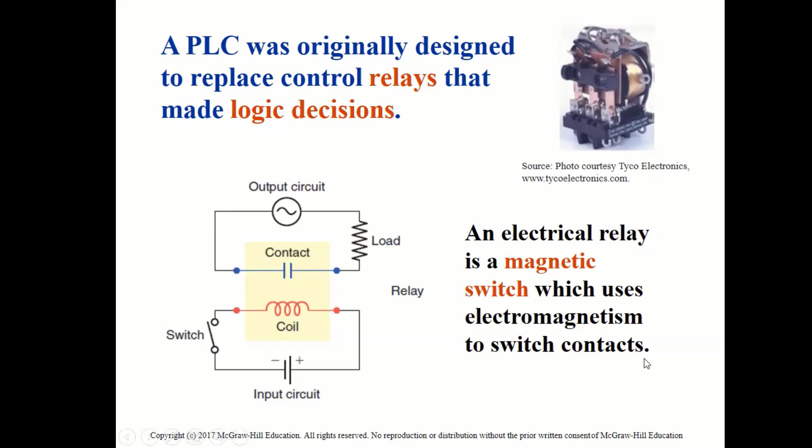Relays, you more or less have an idea of how they work, right? So far, you've seen it. You know what's inside. So I'm not gonna waste your time a lot there, but just know that those electromechanical relays usually come with either a name or some sort of information that you can actually go and look for the variations that you might have.

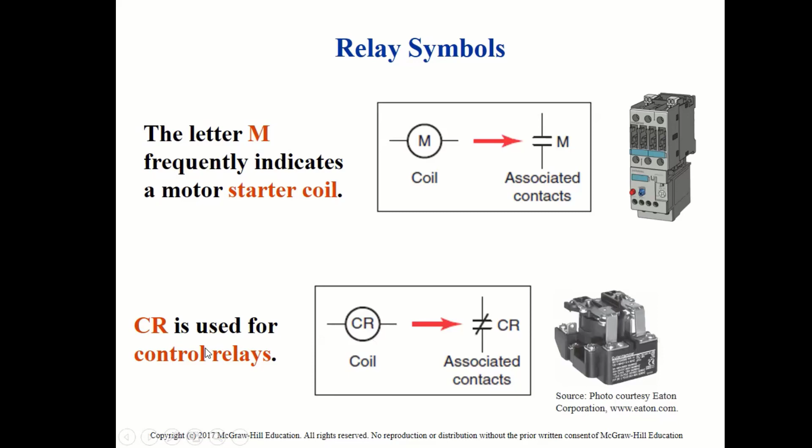And so you energize, de-energize. You've been doing that already. And the contacts, how they work, normally closed, normally open, all that good stuff, you've done it. So we're going to go rather quick. There is usually a difference here between a motor contactor and a control relay. So usually labels like that are going to be on the schematic. M for motor, CR for control relays, which is the one you've been using.

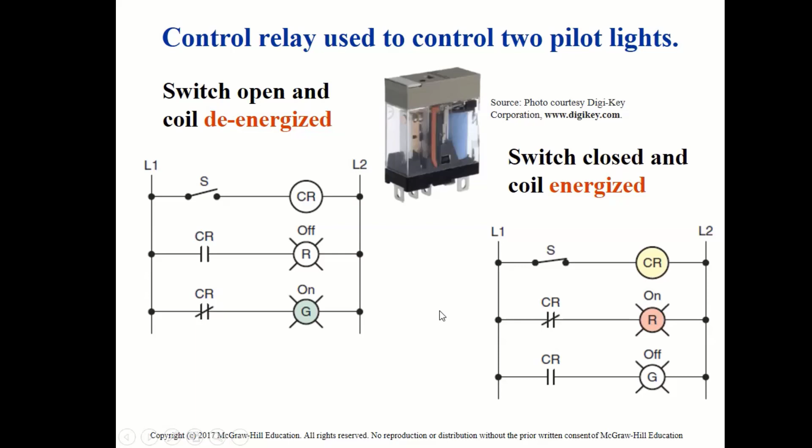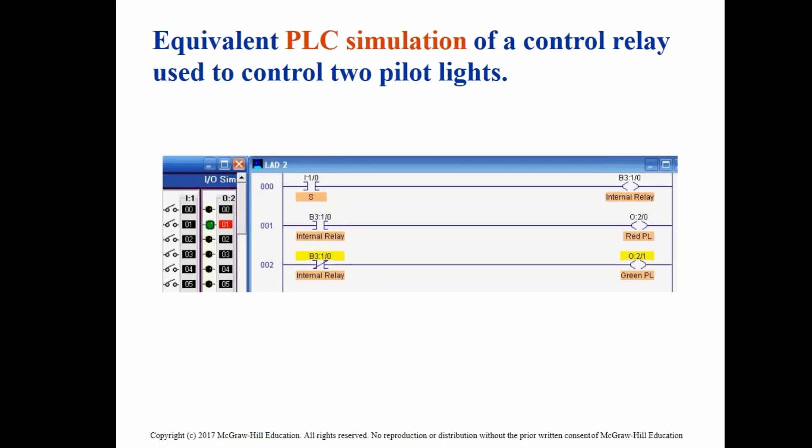All right, there's the relays again. And you guys did some of this already, which is, how do you use the contacts so that you can indicate whether the system is on or off. There's a little demo on that. And you've done not the programming aspect, but the hardware aspect of it. And so that's the next part.

And then I think I briefly mentioned contactors. This is the heavy power loads, things that are used for moving large loads. I'm going to give you a brief demo. At some point today, I got my station kind of working back, and I have one of these large power loads, heavy duty contactors. Remember that I told you that once upon a time when I was learning about PLCs, I connected a load and I burned the PLC.

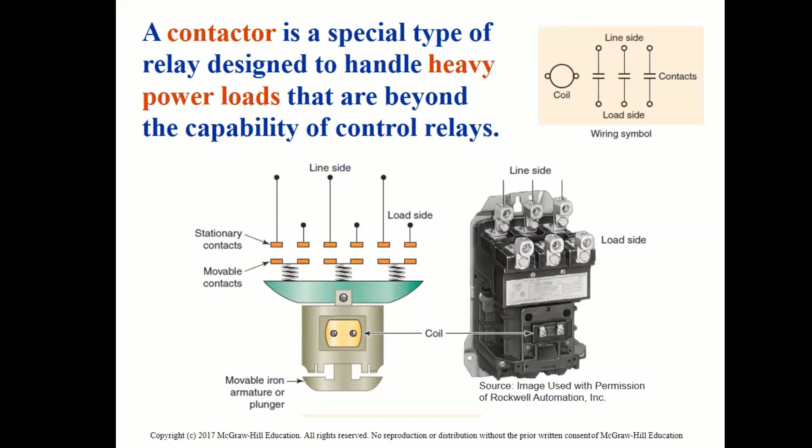And you don't want to do that because PLCs are, again, control devices. They are good to control small loads that at the same time move big loads. So never ever do you want to connect a motor. Well, you can connect a DC motor like the ones we've been using, right? But not a large AC induction motor directly to the PLC contacts because it'll be a little bit too much.

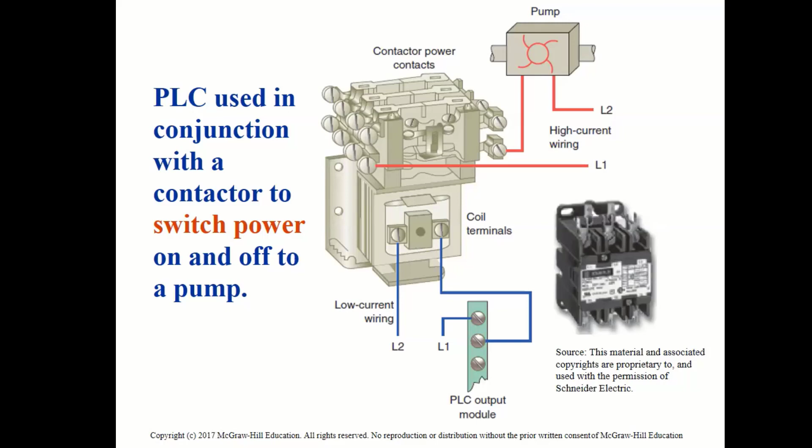So here it is, the contactor. Essentially what the PLC does is just like energizing that coil on that electromechanical relay, the PLC signal will energize the coil terminals, which at the same time make this giant contactor actuate. So you control the coil on that large contactor that controls the load, right? And so that's how we actually take advantage of the automation part of controls.

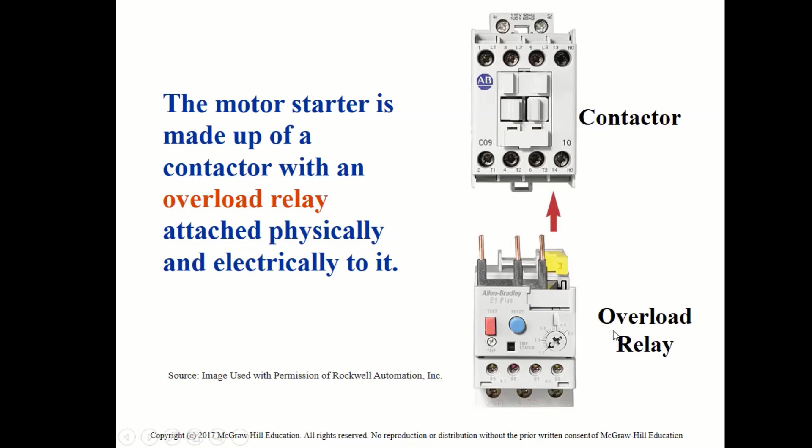All right, motor starters. It's another kind of method that you actually have. So in this case, we have a contactor. It's actually an Allen Bradley brand. And we have an overload relay, which serves as a safety device on the motors. So that if there's an overload, say you have a 5 HP motor, and eventually the load exceeds that amount, this overload relay is going to sense that load. It's going to open up the circuit and hopefully protect everything.

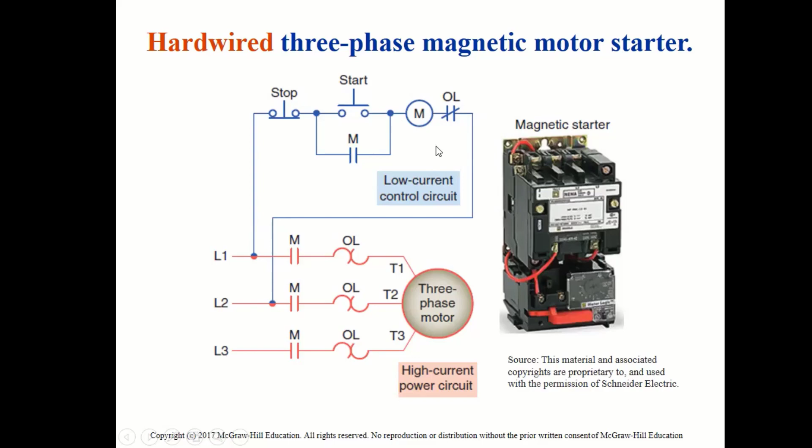But what is really making this happen is your low level voltage control, right? Until you energize the coil of that electromagnetic contactor, nothing is going to happen. So again, the PLC is not controlling the load; it will be controlling your electromagnetic contactor.

So here is a program, and what's involved in a ladder logic program. You're going to have start, stop, the motor auxiliary contact, and then the overload part, right? You want that overload to open up the ladder program if anything happens, right? If any high load beyond the load of the motor is sensed, then you want that to be open. So that's that. Again, same idea here. This is just a simulation of the process.

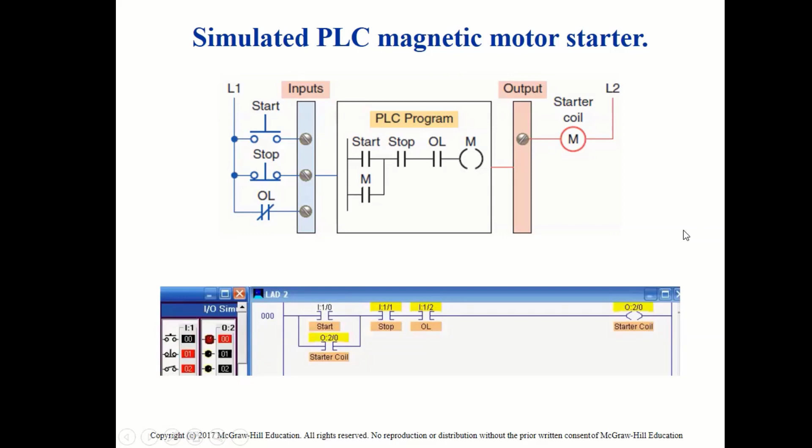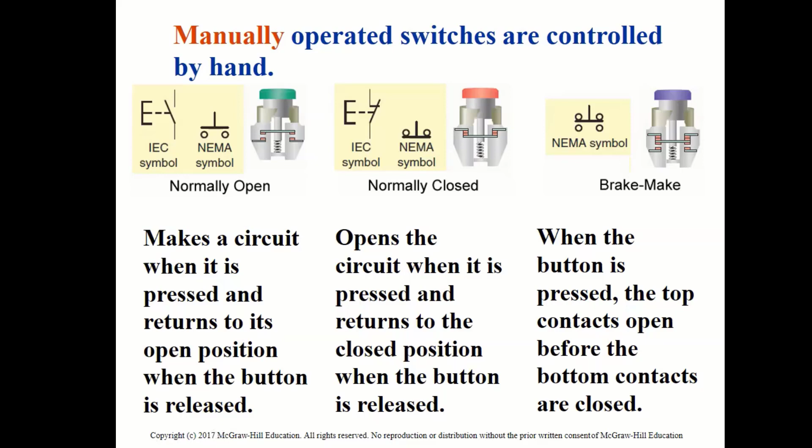Okay. Manually operated switches, there's a lot of those. We talk about them a little bit early on. Normally open is usually for start, normally closed is usually for emergency. And then you have some NEMA type, which are of the type break-make, right? So you have to press to activate them. You press to open, you press to close. And so those are some of the types that you can have.

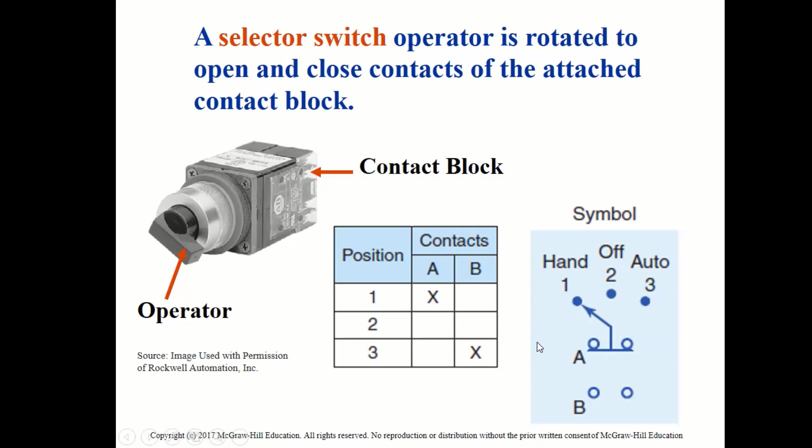You also can have a selector switch that will be used for multiple positions. An example of that is when you want to put your system in auto mode, you want to put the system in off mode, and then in manual mode or hand mode, as is said. So multi-selector switch. You also have DIP switches, which are used when you have various kinds of loads or inputs that you want to put into the system, right?

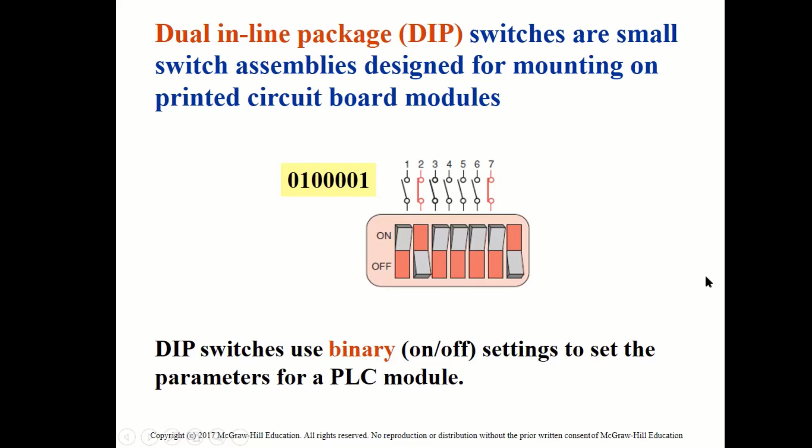All right, mechanically operated switches. Again, there's a lot of electromechanical switches, including limit switches, and run switches is another word that is used.

Hi, Constantine, how you doing? Good, how are you? Welcome. I miss you.

And so these are different kinds of limit switches. And again, the concept of normally closed, normally open, it's on all electromechanical control blades, right? Just be mindful that a normally open contact means that it needs to be energized to be closed. A normally closed contact means that when energized, it opens, right? So that's a concept we've been talking about.

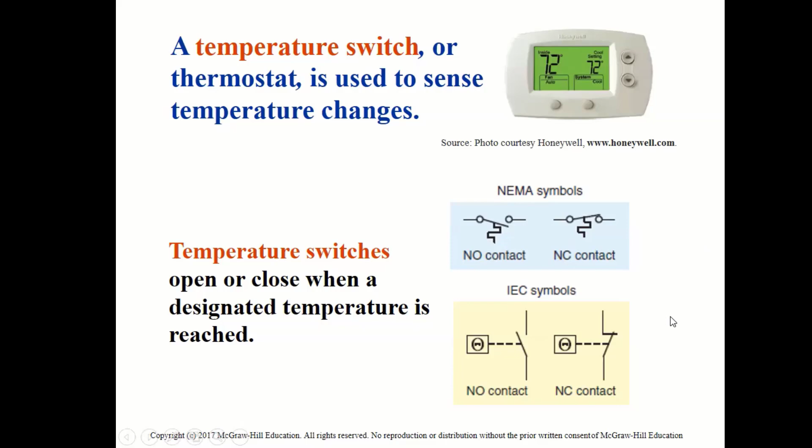Temperature switches, those are switches that will activate or actuate based on sensing temperature, and they will open or close depending upon what their normal default status is, but they will actuate with temperature, right? And the thermostat is always an example that is brought up for that.

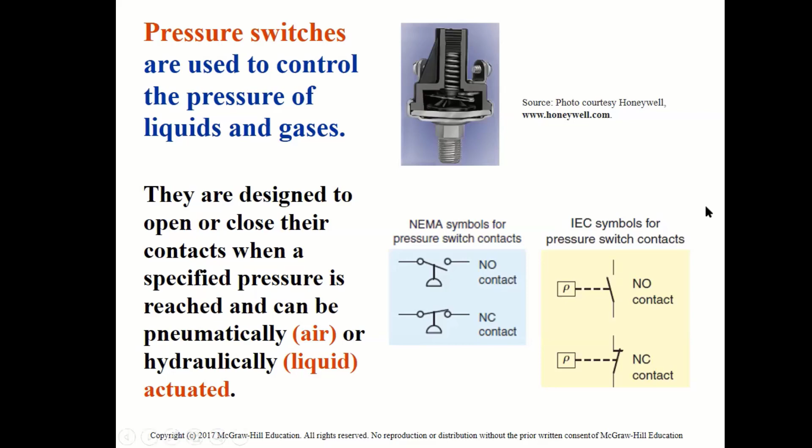You also have pressure switches of different kinds, and they actually can control air or liquids, and they can also be either normally closed or normally open. Compressors, chambers, boilers, and things like that use this type of switches, pressure switches. You also have level switches that you can use to sense liquid levels. And again, the idea of normally open, normally closed is going to be there.

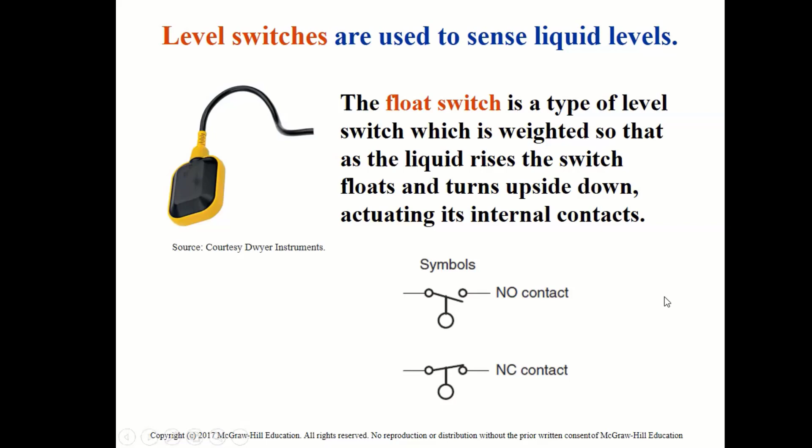All right. You also have sensors, which, generally speaking, we're still talking about discrete components, right? And it is everything that sends a signal to open or close a circuit, or a signal to say, yes, I'm turned on or I'm turned off, right? And so proximity switches can be categorized in a separate group. And the reason being, there's usually solid state electronics involved in those sensors. All right.

Depending on what is being detected, you can have various kinds of sensors. One of them being an inductive sensor. That's proximity sensors that are used to detect both ferrous metals and non-ferrous metals, right? So that will be an inductive type. And there is a little bit of the principle of electromagnetic field inside, which is at work.

Okay, I want to move this a little bit out of your way. All right, so those are inductive sensors.

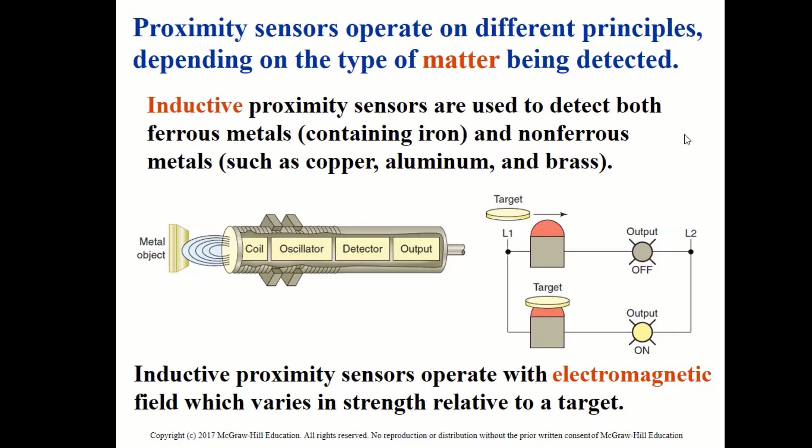You also have proximity sensors that will sense a range of distance. They usually are equipped with an LED status indicator to show you when the sensor is on or off, energized, de-energized. This idea of leakage current is something to keep an eye on, and there's usually a way to fix that, and that's what they call using a bleeder resistor, right?

So that bleeder resistor takes care of that leakage current, and the leakage current could be a problem because it's almost like you're trying to send a liquid or a gas to another place, but at the same time you have a leak somewhere in the pipelines. You don't want that. So in the case of electrons and protons, we actually use a bleeder resistor for that.

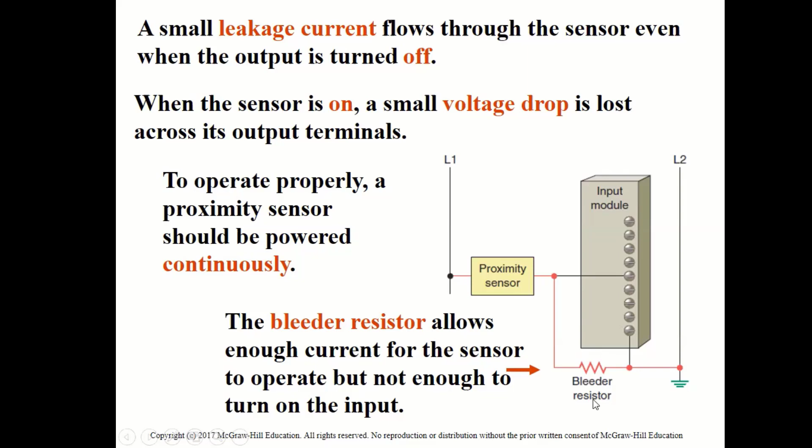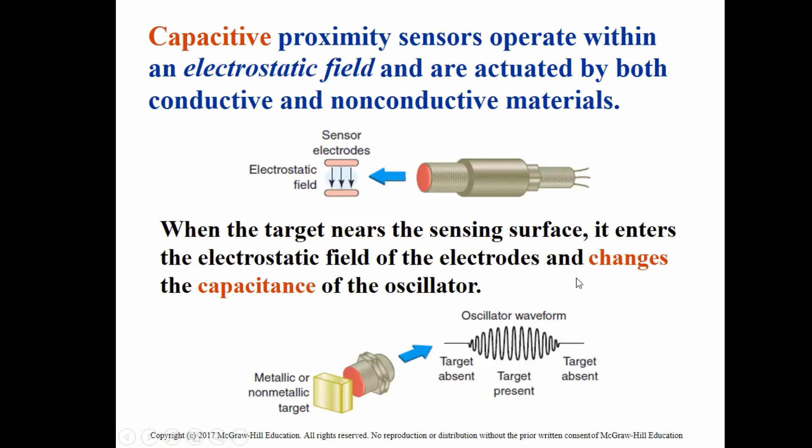You also can have capacitive proximity sensors, which operate on an electrostatic field, and they can be actuated by both conductive and non-conductive materials. So when you put the target near the sensor surface, it enters the field and then changes the capacitance of the oscillator. You can sense metals and non-metals with that.

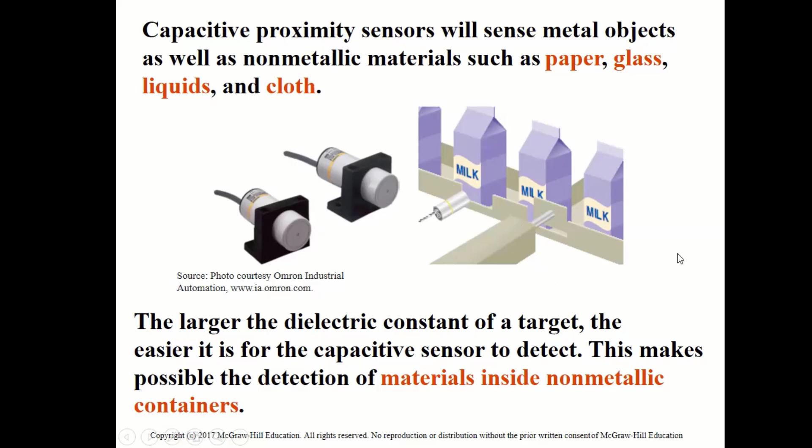They will sense metal objects as well as non-metal materials such as paper, glass, liquids, cloth, and so on and so forth. They're usually used in some form of a production line.

Okay, magnetic reed switches are another popular type of switch. It's got two flat contact tabs that are sealed in a glass tube. And when there's a magnetic force that is generated parallel to the reed switch, the reeds will draw together to activate as a switch. So magnetism will close those reeds. And it is usually caused because the object is metallic, right?

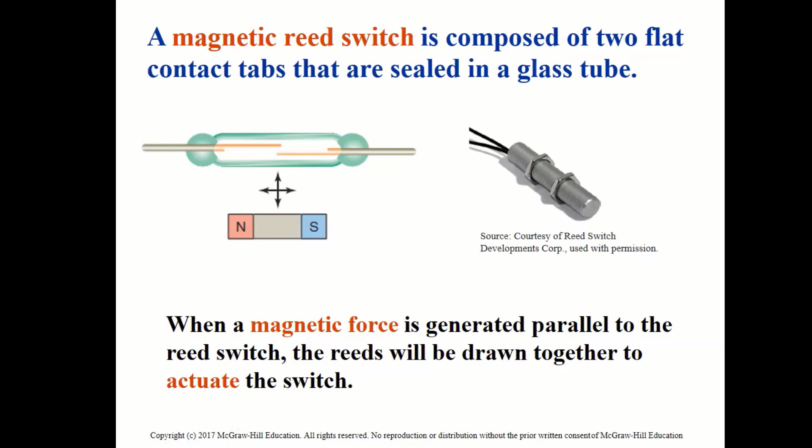There's actually a number of applications that you can have for that. You could have a moving part that is being sensed by the reed switch, or you could have a moving part that is moving the reed switch and activating the reed switch, opening and closing the reed switch. Magnetic reed float switch, that's another type that you can actually use for magnetic purposes.

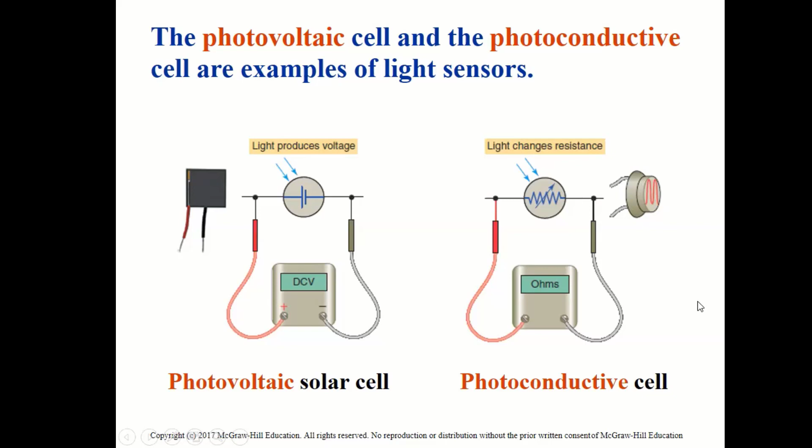You can also have photovoltaic or photoconductive ones that are other types of switches. I mean, a popular type of this is the photocells in the streets, right? Our lights go off in the daytime and on in the nighttime because of the photovoltaic sensor switches that you have on those street lights.

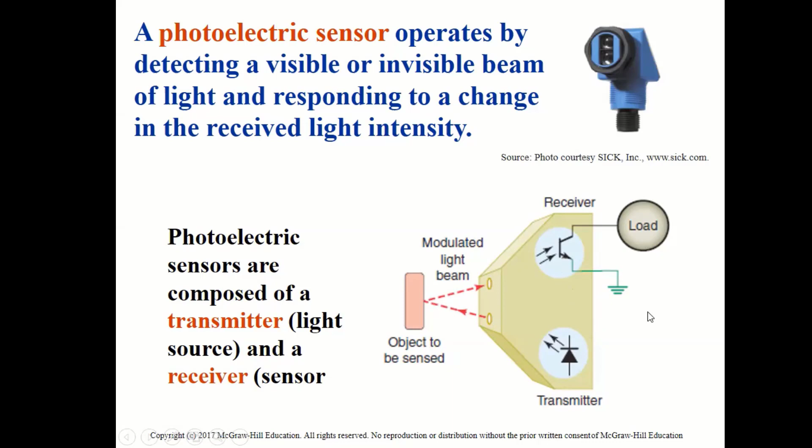This is another type, the photoelectric sensor. You're going to have a visible or invisible beam of light that will respond to a change, right? And you're going to have two pieces in it, transmitter and receiver. And it's also called optocoupler because you actually couple a couple of electrical signals.

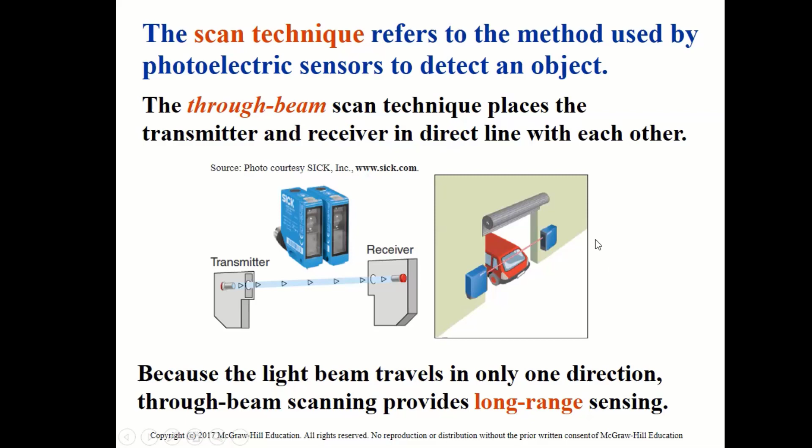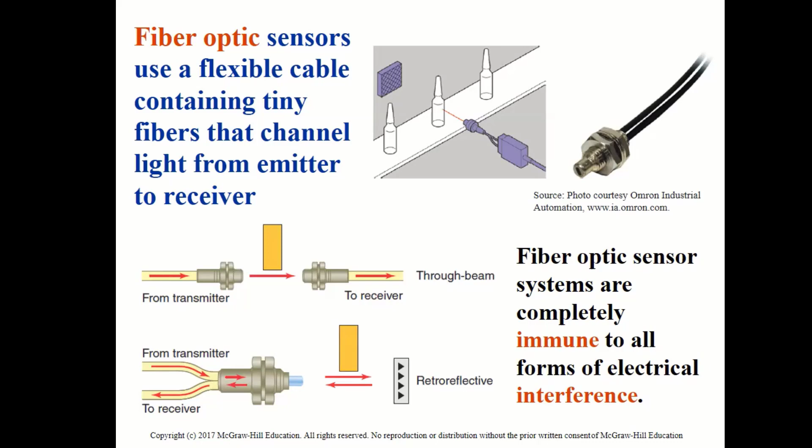Fiber optics are other types that are actually used today for various applications, one of the main ones being some sort of communication, but fiber optics have changed life. I mean, we've got all kinds of automobile cabling systems with fiber optics, medical equipment with fiber optics. There's a lot of applications in that area.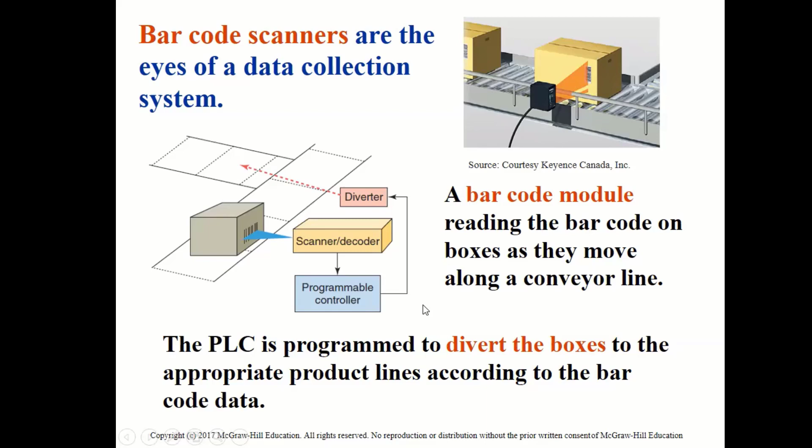Barcode scanners are the eyes of data collection systems. So that's another method of a PLC potentially scanning products or boxes using barcode scanners. You can also have ultrasonic sensors, right? They're used in robots in industrial processes to detect different objects and things that are happening.

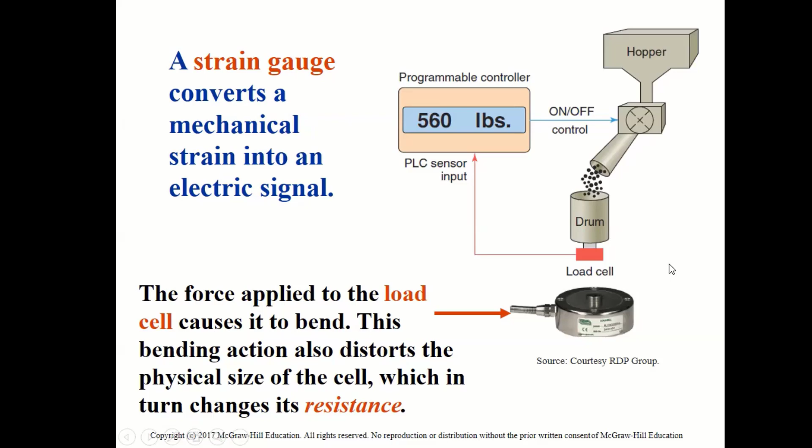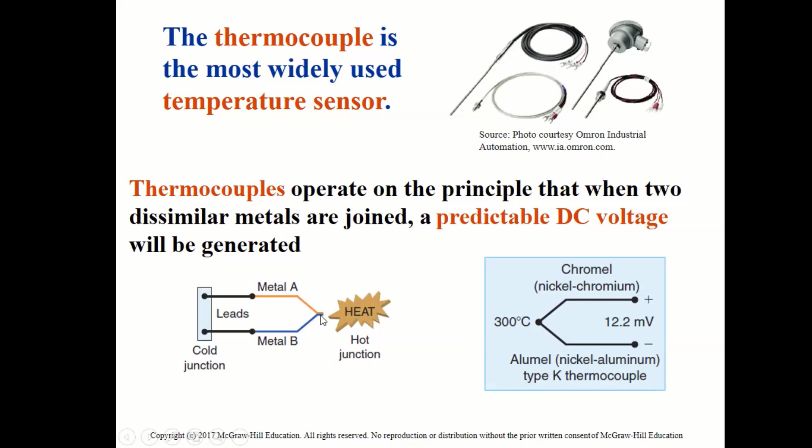Strain gauges. I'm sure you probably have done some experimental work because you guys do a lot of material stressing and stuff like that, right? Mechanical engineering, and so you could use strain gauges to collect data from strength of materials and things like that. All right, thermocouples also are used as temperature sensors, right? And we know that basically you have a junction that you heat up, and you're gonna have a change of difference of potential as that is heated up.

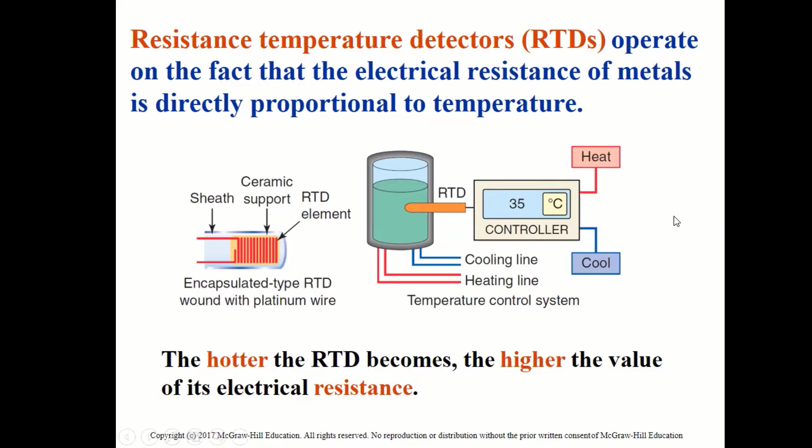All right, resistance temperature detectors (RTDs) are another type. You're gonna have a resistance that's gonna change with temperature, whether that's positive coefficients or negative coefficients. So those are another type. Flow meters or flow measurement devices, which are inside liquids or fluids, are also part of this group.

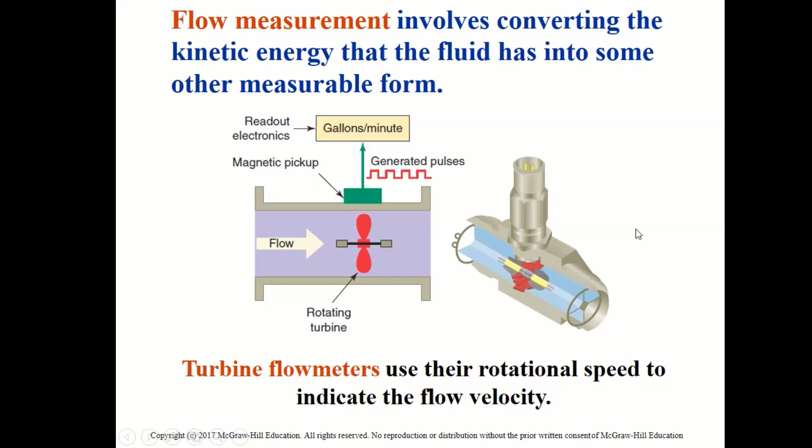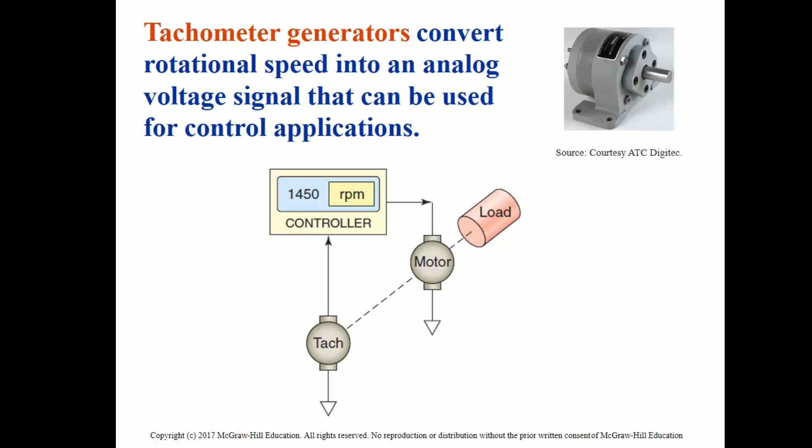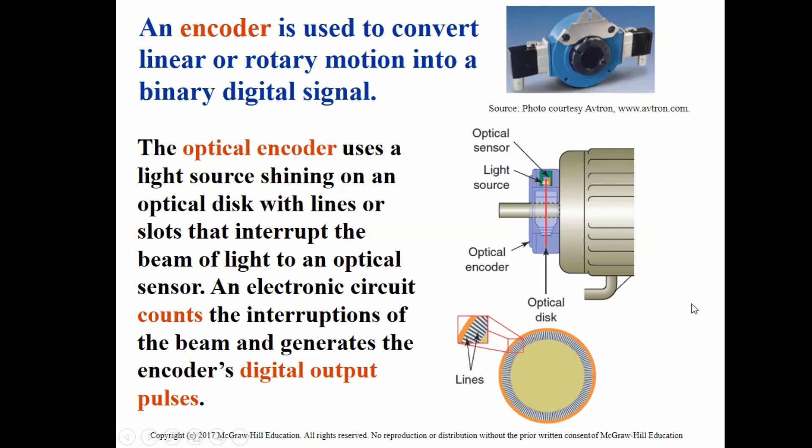Tachometer generators you're gonna use to convert rotational speed into some form of analog signal that can be used to control an application, a special analog application. I think we talked about encoders a little bit, optical encoders, and how you can actually use them for purposes of taking some action, doing some tasks.

You're going to have all sorts of actuators that will be used as an output. A solenoid is one type of actuator, actually a very popular kind of actuator. A solenoid is used to either open or close the passage of something: liquid, water, fluid, air, whatever. All right, so solenoid valves are very popular.

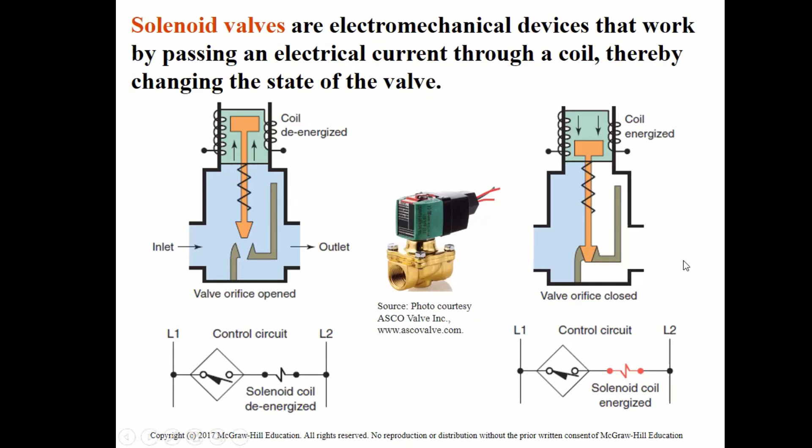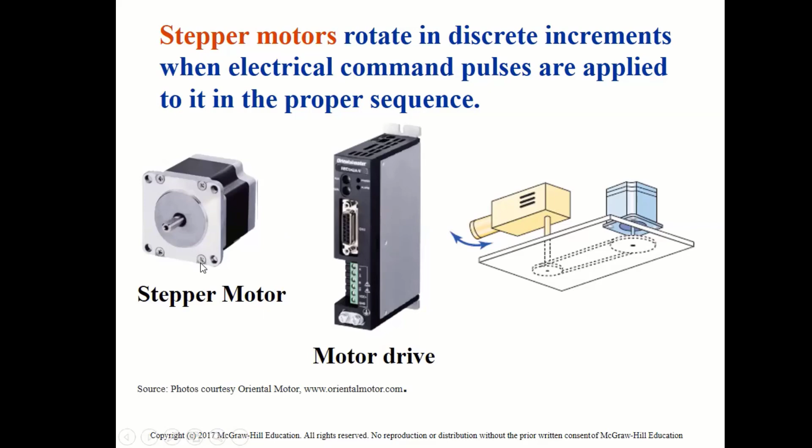Stepper motors, which are very popular in industrial controls, are actually also part of the outputs. You can have a motor drive a stepper motor, whether individual stepper motors or in the form of an automated system like a robot. How that works is you divide the revolutions into a number of steps, and the motor will be sent a voltage pulse for each step. Then you have the rotation, which is proportional to the number of pulses, and the speed of rotation, which is relative to the frequency of those pulses. So you have pulses, you have frequency, and then you can determine the steps of a stepper motor.

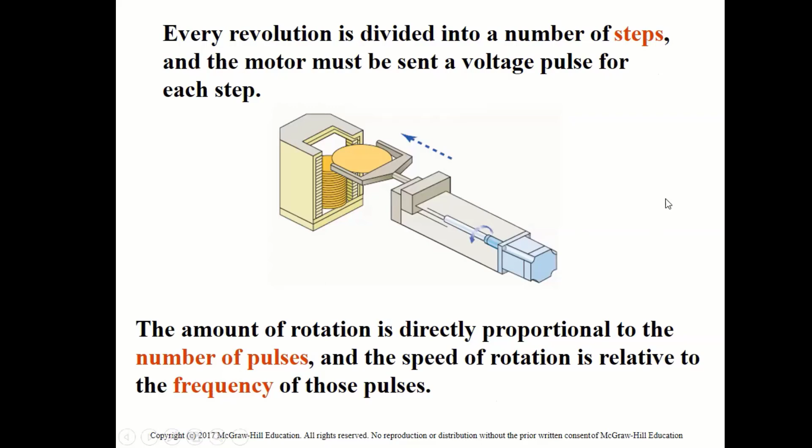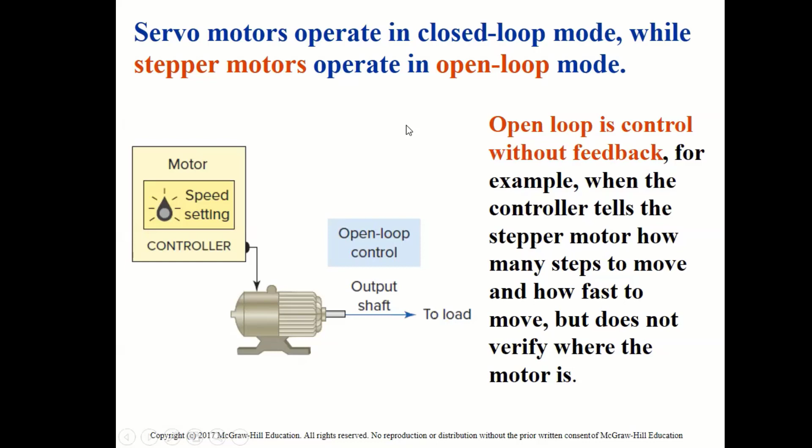You also have servo motors, which are relatives, but they operate in a closed loop mode, while the stepper motors operate in an open loop mode. In other words, the servo motors will have some form of feedback that will help that motor do its work. So more on servo motors. There's all kinds of various applications. There's a controller, a servo amplifier, a servo motor, the load, and the feedback: the device that sends feedback information back to the servo amplifier or the controller.

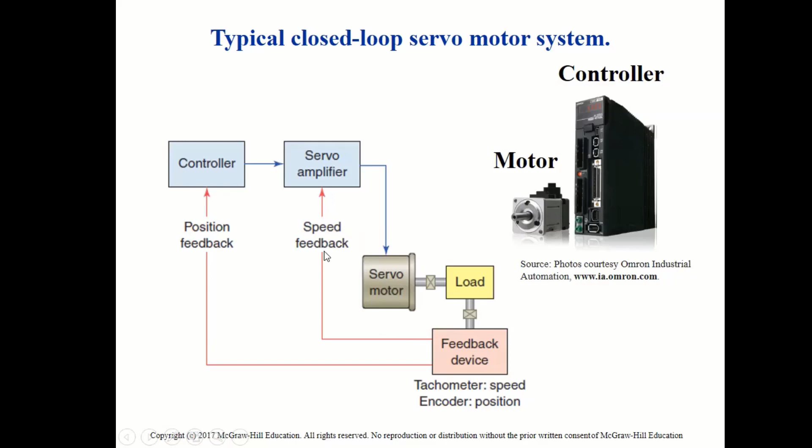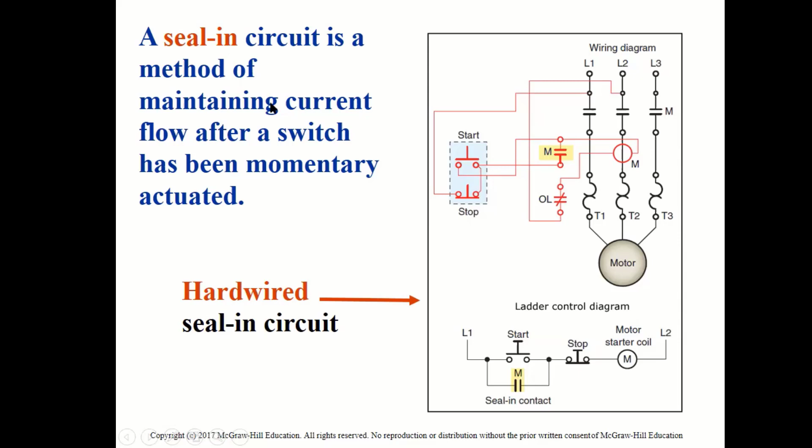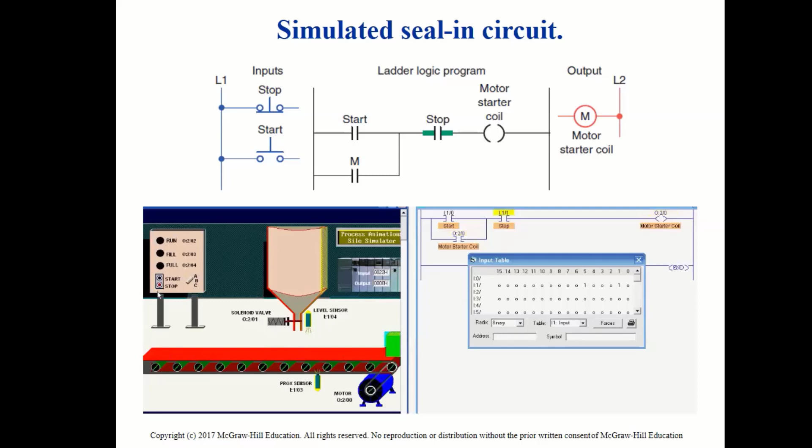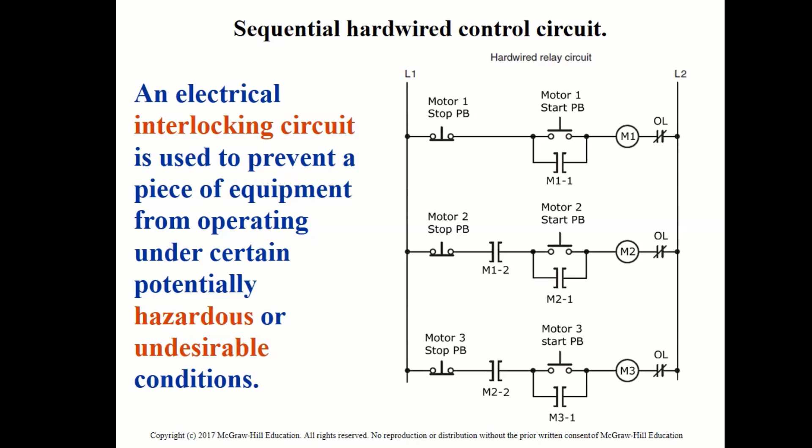We didn't get to do this part, which is actually the last part of the handout that I gave you. I don't know if we're going to do it or not, but here's a schematic diagram for that, and that's an interlocking circuit. When you have a machine or system that you want to rotate in two directions, you don't want anything to happen while the machine is running in one direction, right? It'd be awful to go in overdrive and then put it in reverse. You know what's going to happen. So the same idea here. It's an interlocking circuit, a safe circuit.

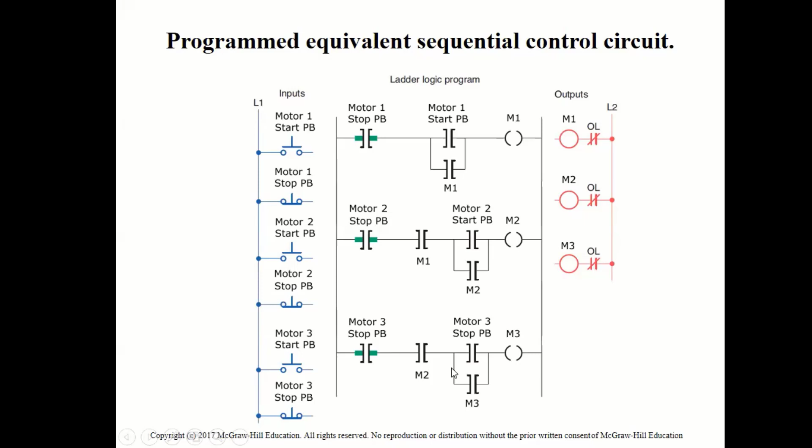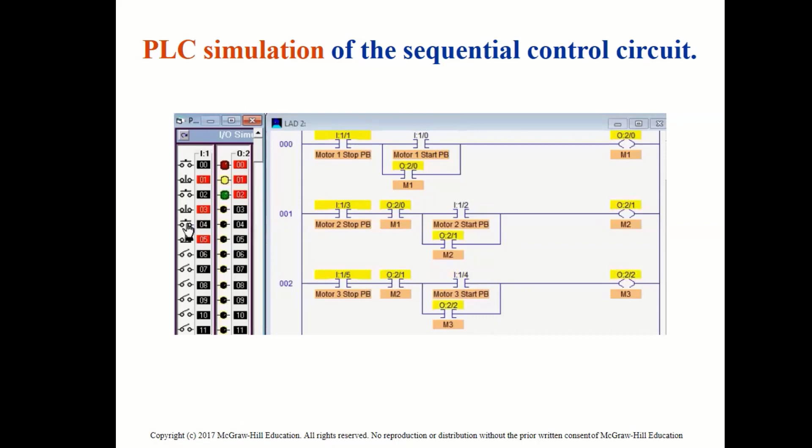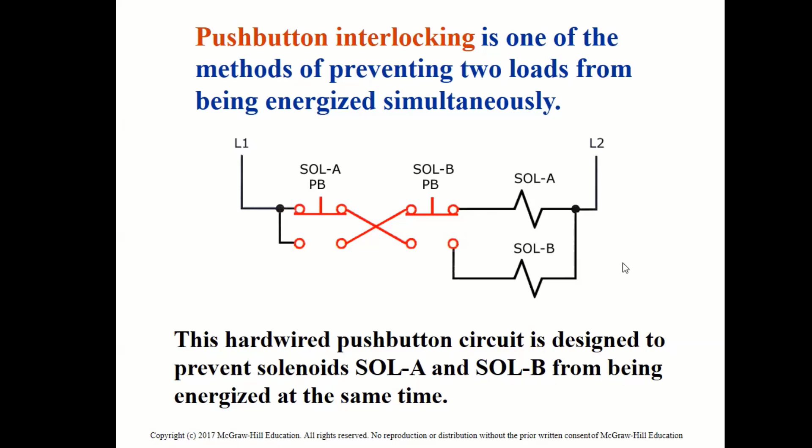So you can have this idea of interlocking, whether physical or software based. In this case, the circuit prevents solenoid A and solenoid B from being energized at the same time. We just want one of them energized, not both. Here's the simulation for it. You can only have one at a time. That might be the same situation when you have a machine that rotates in two directions.

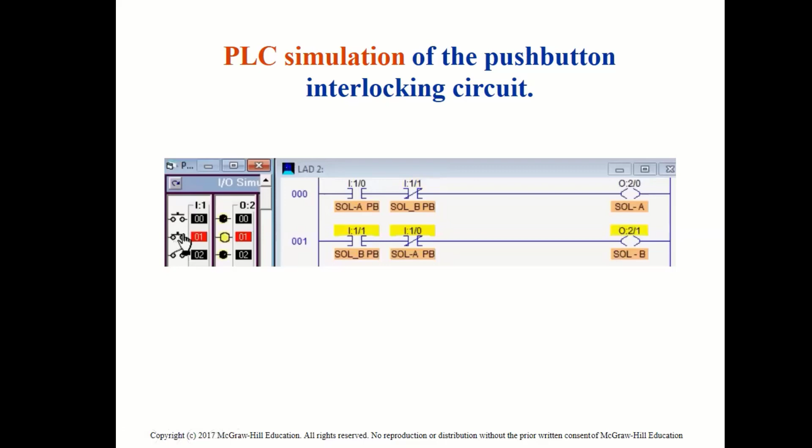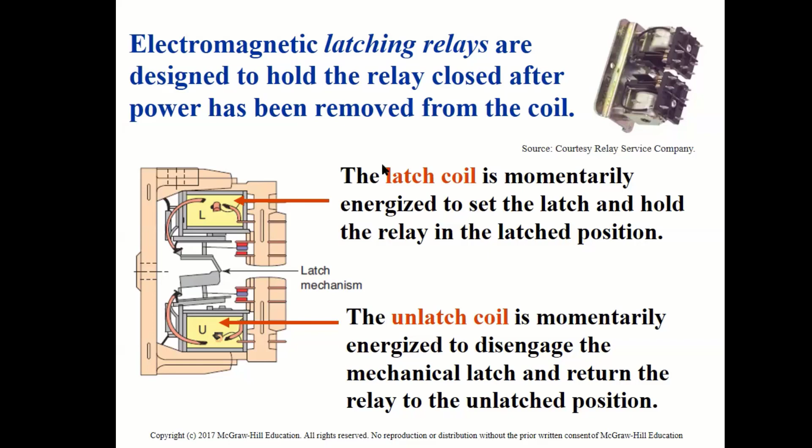Latching relays. Latching is momentarily energizing and holding the relay in the latch position. Then you have the unlatch coil, which momentarily energizes to disengage the mechanical latch and return the relay to the unlatched position. We also have software-based latching instructions, which are the OTL with the L and OTU with the U. So you can latch and unlatch an instruction which at the same time will execute an output. Here's an example of a hardware and program latching circuit.

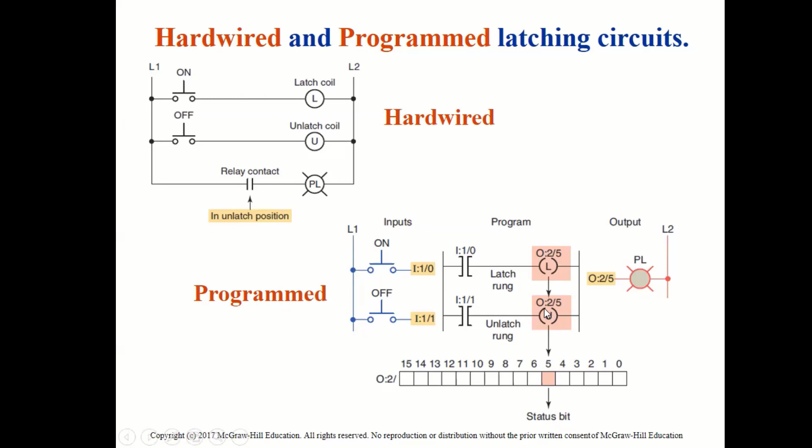So when input 1 is on, the circuit latches. The advantage of this type of instruction is that it doesn't require any auxiliary contact, because the latch itself does the work. And then when you turn it off, you unlatch it. They both have the same address because they're referring to the same output. So that's the latching instruction, and the unlatching.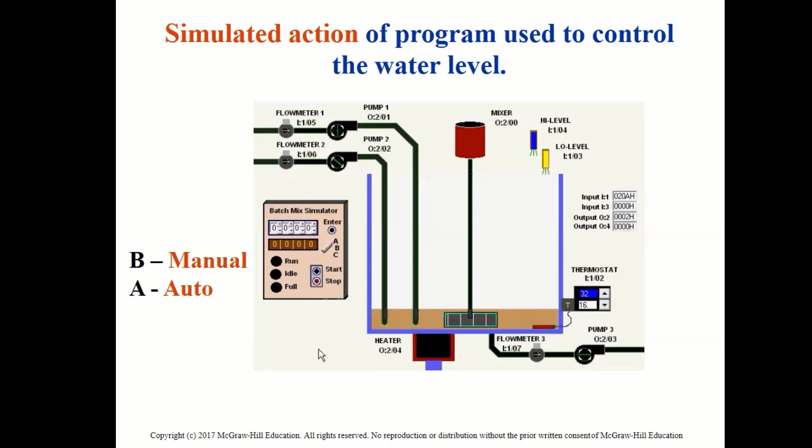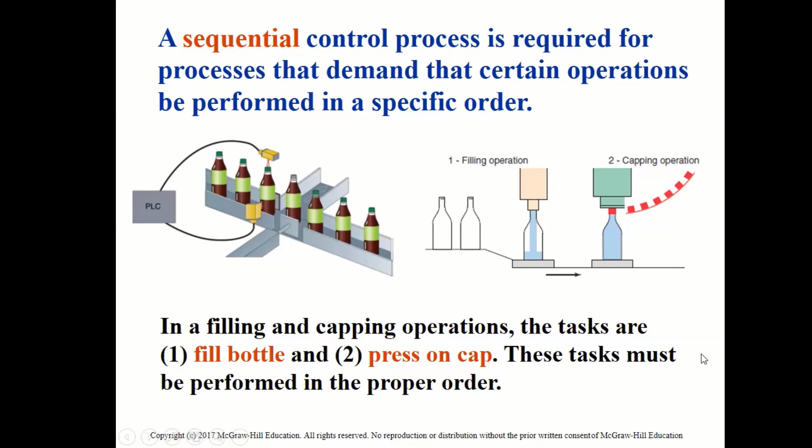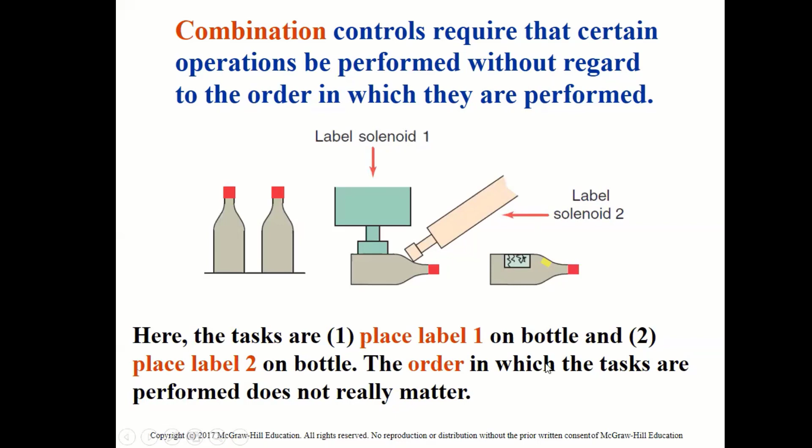Okay, and this is the main part. So we're gonna stop here, we're gonna do it. So here's the sequence control process. That's a bottle filling application. The task here is to fill the bottle and press on a cap. And so you have to have an order. Combination controls require that certain operations be performed without regard to the order. All right, here the tasks are: one, place label 1 on the bottle; two, place label 2 on the bottle. In this case, the order doesn't really matter, right? You can do label 1 or label 2, whatever the case might be.

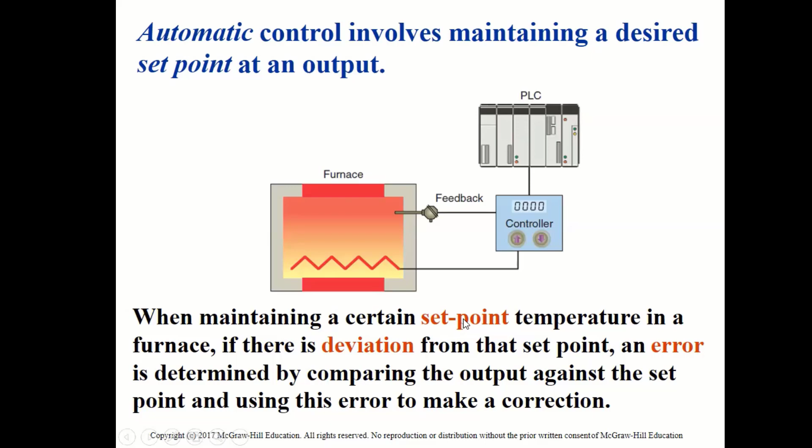You also might have automatic controls where you want to maintain a set point, right? And if there's any deviation from that set point, you're going to have an error that will compare against the set point, and you're going to have a correction factor.

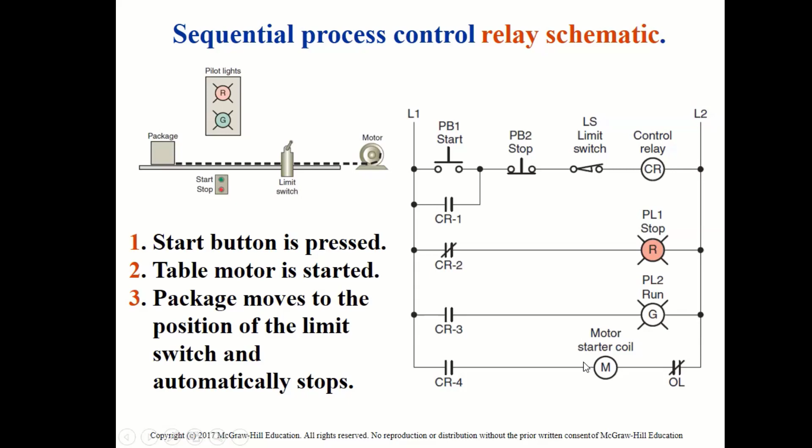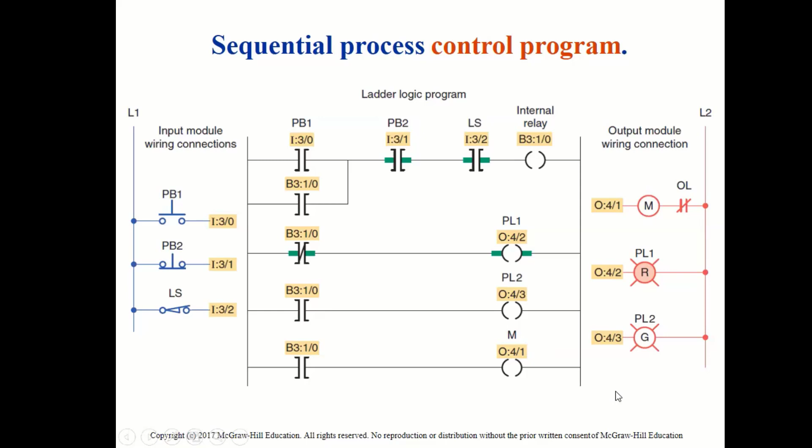Here is the sequential process control, right? You're going to press the start button. You're going to start that. The table motor is going to get started. The package is going to get moved to the position of the limit, and automatically it's going to stop. So that's a sequence. And this is how it will be implemented, right? Start PB1, then the relay is energized. It's going to move, and when it reaches the end, it's going to stop. So that's a sequential process. There's a simulation for it. And here again, the IOs are simulated by these switches, switch inputs.

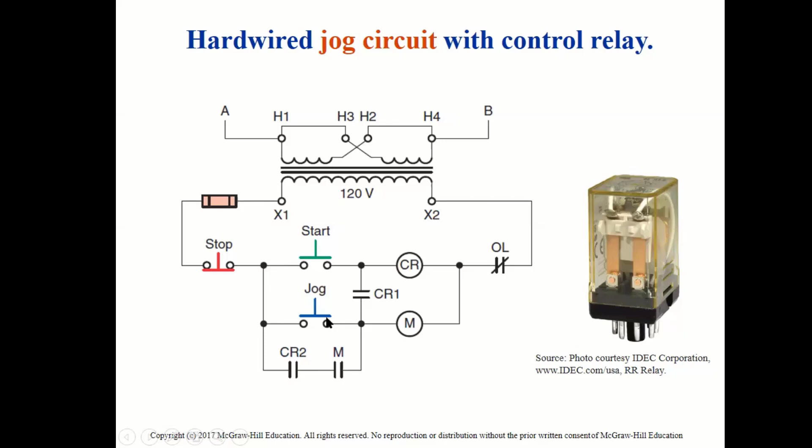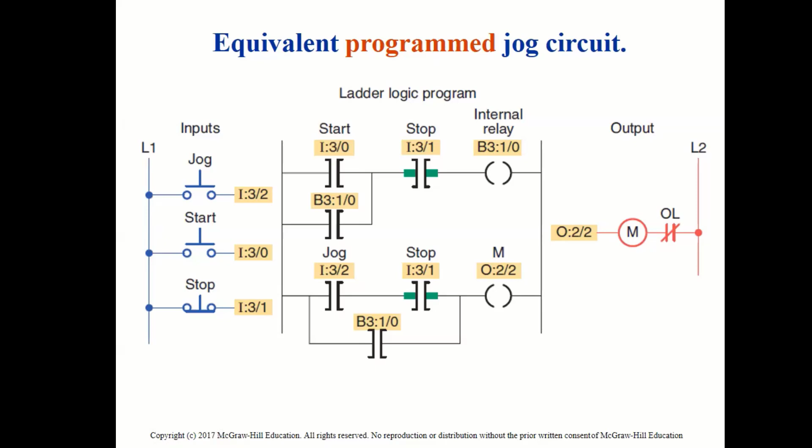All right, sequence the instructions from the most likely to be false to the least likely to be false. We talked about the sequence of operation. A jogging circuit is a very popular type of circuit which allows you to reposition the machine to a certain spot you want. And so notice that they just added a momentary button here that will allow you to energize the circuit and jog it. Okay, so here again is the jogging circuit. Kind of a special application for when you want to be able to have control over the machine. Sometimes running the machine and stopping will not stop it where you want it, versus jogging the machine. That's a good application.

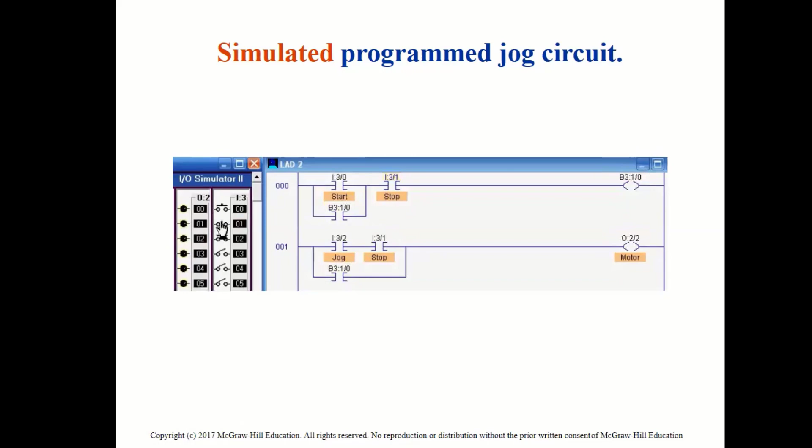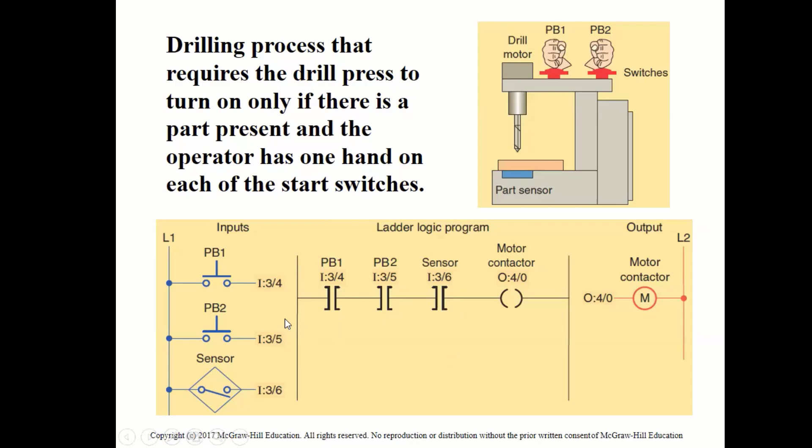All right. Here is an operation, a drilling process that requires the drill press to turn on only if there is a part present and the operator has one hand on each of the start switches. That's a semi-automatic operation. So 3 conditions have to be met, right? The part has to be present. Both hands of the operator have to be on for the press to drill the hole. So that's the input, that's the output, and that's the actual ladder logic program. Okay.

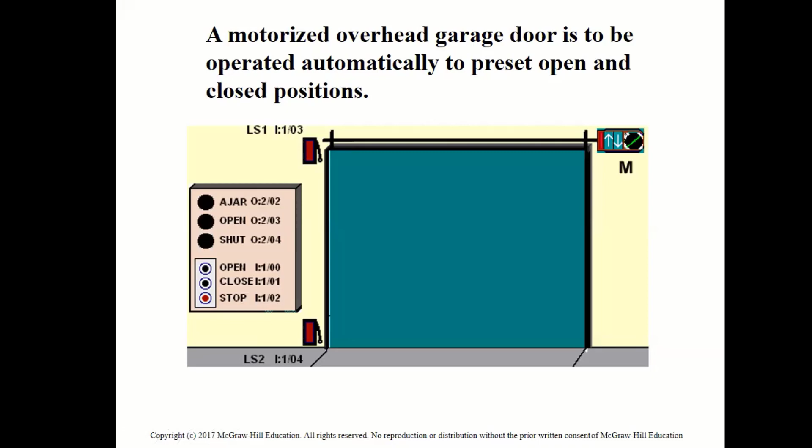Here's an overhead garage door that is operated automatically to preset open and close positions. Here's the motorized overhead garage door ladder logic program. A nice simulation.

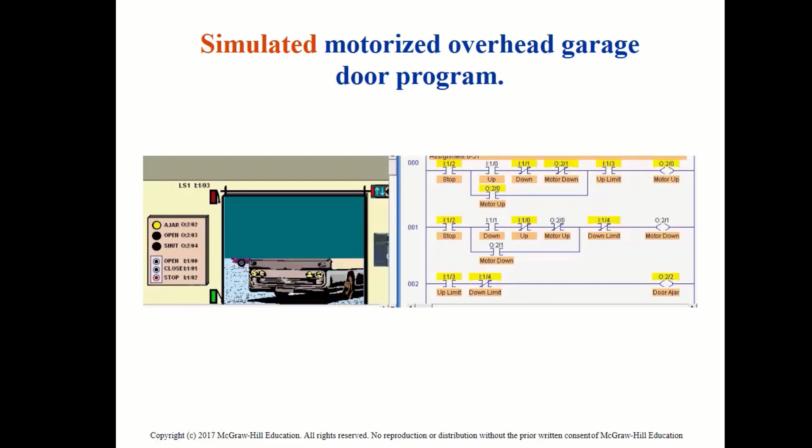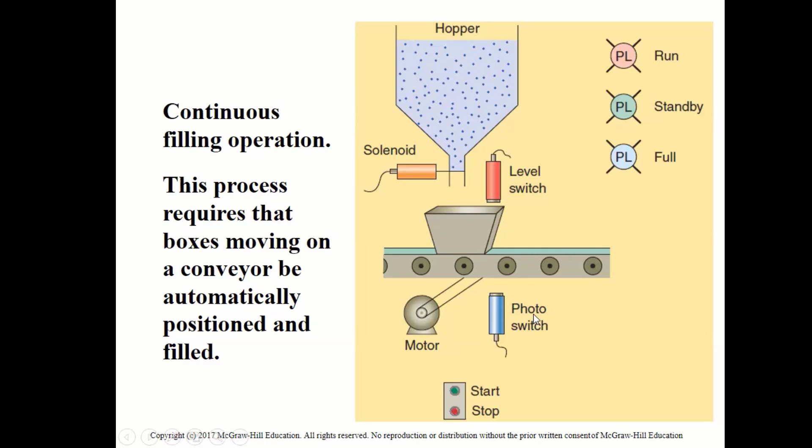Okay. Continuous filling operation. So you're going to have boxes moving on the conveyor, and they need to be automatically positioned and filled. And so there's various things that are going on here, right? The indicator lamps, the motor moving the conveyor, the solenoid on the hopper, and then the sensors and switches. So that will be the ladder logic equivalent. We got our inputs, we got our outputs, and we got the ladder logic equivalent.